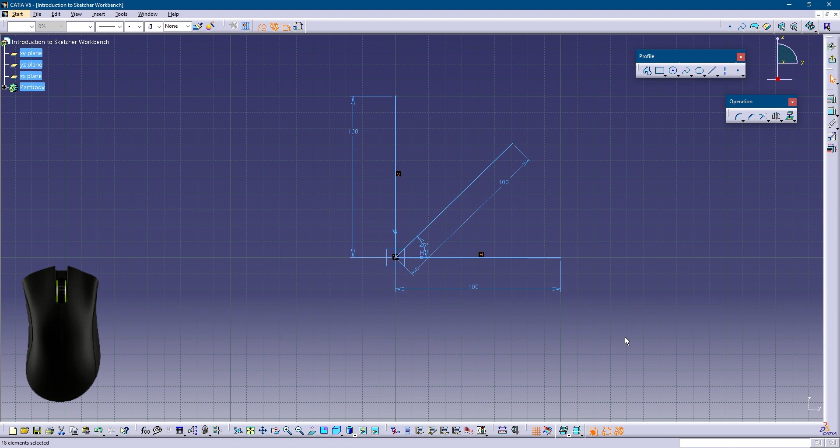Drag and drop the mouse to select the sketch, and press the Delete button. Click on the Line tool and give the first point. Previously, we manually added the constraint to the lines, but we will use this tool to add the constraint automatically.

Before we give the second point of the line, press the Tab button from the keyboard a few times and change the length. Do not press the Enter. Again, press the Tab to change the angle. Now, press the Enter. It will automatically add the constraint to the line.

Click on the Infinite Line tool. It will create an infinite line. This is a horizontal line. To change it, click on this icon to make it vertical. To make it inclined, click on this icon. Give the first point. Add the angle of 120 degrees.

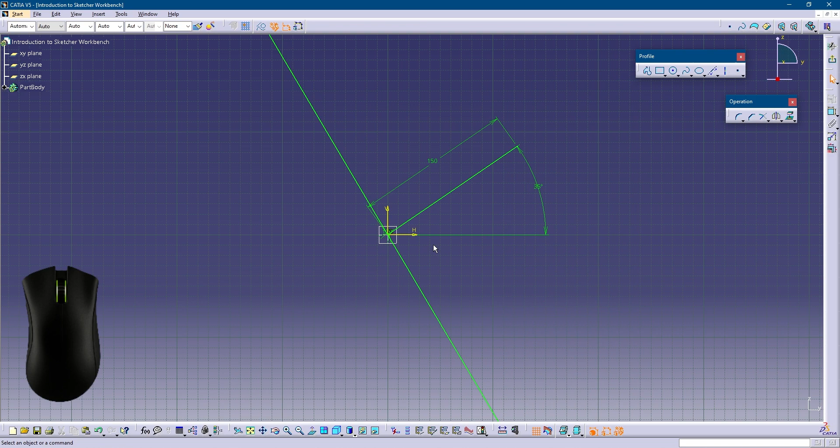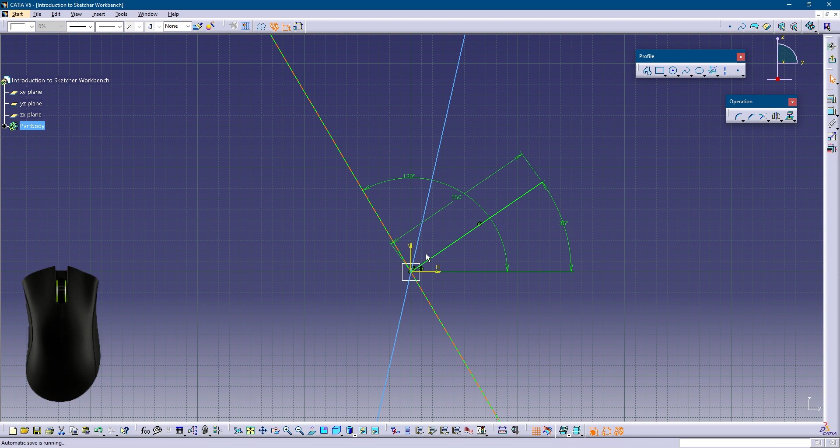Click on the bisecting line. Select any two lines about which the bisecting line will be generated. Select the sketch and press the Delete button.

Click on the Circle tool. The same can be accessed by going to Insert, Profile, Circle, and Circle. Give origin as a first point. Give the second point. Create one more circle.

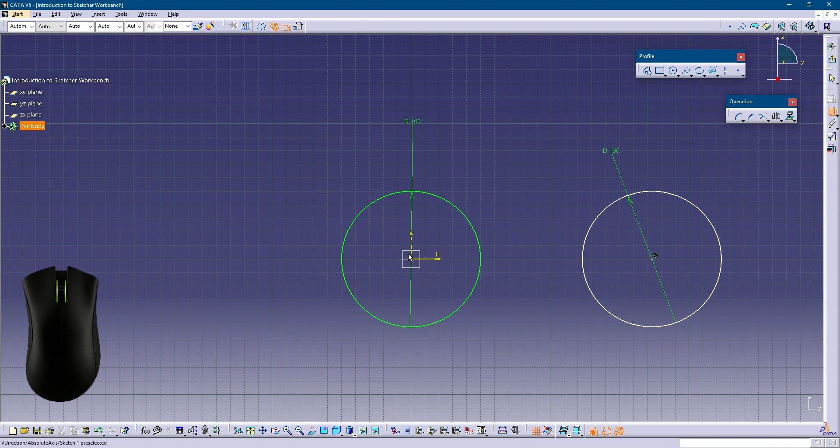Click on the Constraint tool and select the circle to add the diameter. Double-click on the constraint and change the value. Add a constraint to the other circle as well. Click on the Constraint tool and select the center point of the circles to create a distance constraint.

Now, click on the Bi-Tangent Line tool. Select the perimeter of the circles. It will create a tangent line about the circle's perimeter. The way we select the circle, the bi-tangent line will be created according to that.

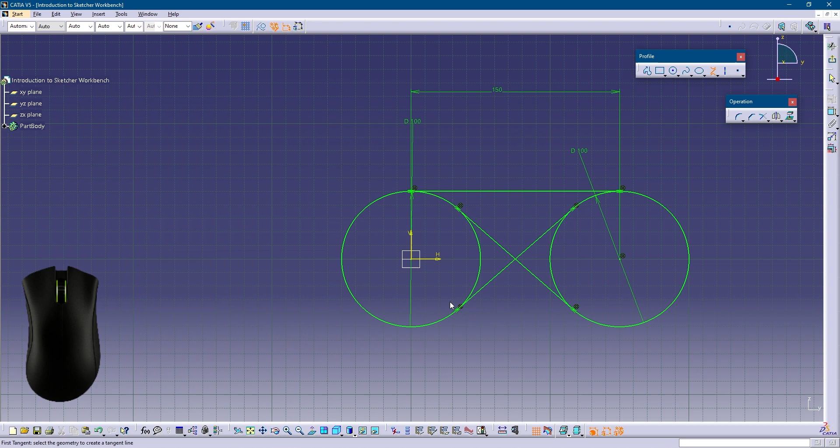Click on the Line Normal to Curve tool. Select the circle as a first point. Give the second point. It will create a line perpendicular to the perimeter of the circle. Select the whole sketch and press the Delete button.

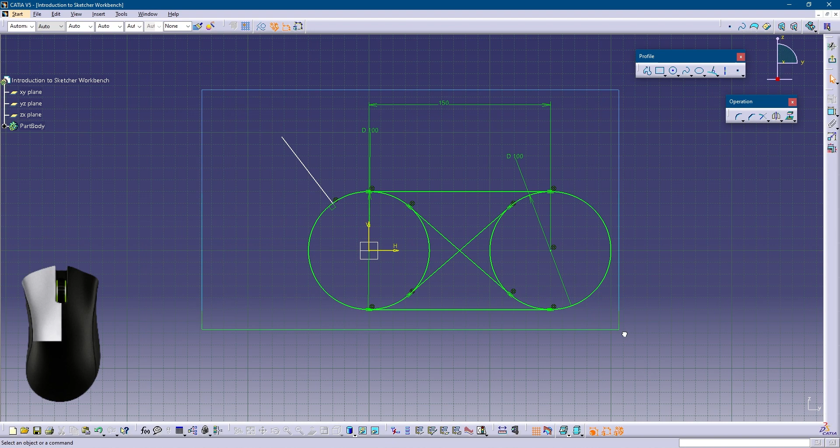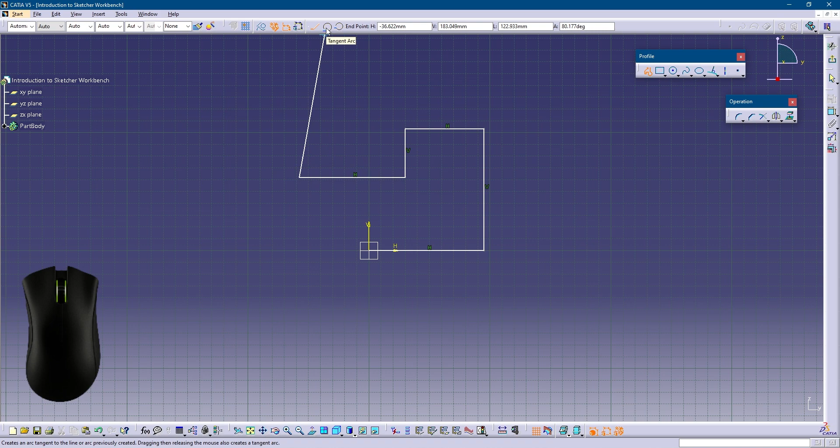Click on the Profile tool. The same can be accessed by going to Insert, Profile, and Profile. We can create a continuous line using the Profile tool. Click on the tangent arc icon to add the arc tangent to this profile.

Here, a few things to note. Some lines of this profile are in green color, whereas others are in white. Green means that the line or the curve is fully constrained. White means that the line or the curve is under-constrained. Make the profile fully constrained by using the Constraint tool and adding as many dimensions as possible to it.

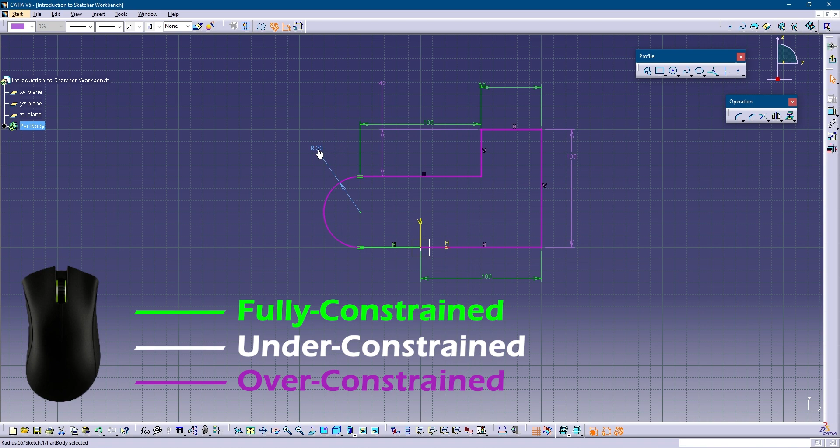Now, the profile is fully constrained. If I add another constraint to the profile, the color will change from green to purple. Purple means that the line or the curve is over-constrained. We have to remove any one of these three constraints to make it fully constrained. Just click on this constraint and press the Delete button. Now, the profile is fully constrained.

Select the whole sketch and press the Delete button. Click on the Rectangle tool. The same can be accessed by going to Insert, Profile, Predefined Profile, and Rectangle. Give origin as a first point. Give the second point. Click on the Constraint tool and add the dimensions to the horizontal and vertical lines.

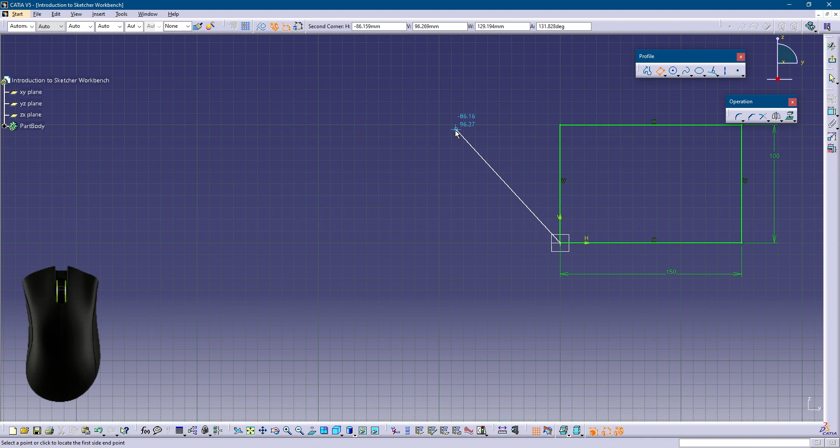Click on the Oriented Rectangle tool. Give origin as a first point. Give the second point. Give the third point. Click on the Constraint tool. Select the inclined line and the vertical line to add the angle constraint. Add dimensions to the remaining lines as well. Select the sketch and press the Delete button.

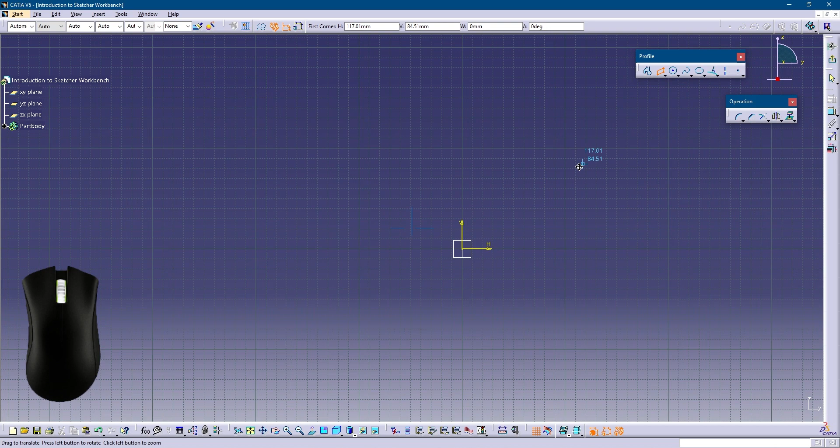Click on the Parallelogram tool. Give origin as a first point. Give the second point. Give the third point. This small symbol, which looks like the equal sign, means that the parallel constraint has been applied between these two lines. Click on the Constraint tool. Add length and angle constraint to the sketch.

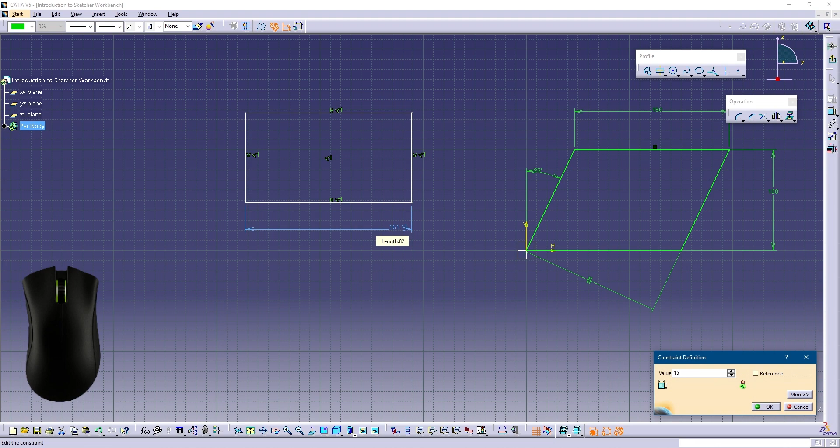Click on the centered rectangle. This time, add the first point anywhere on the screen. Add the second point. A rectangle is created about its center point. Click on the Constraint tool. Add the constraint to the horizontal and the vertical lines. Here, because we haven't started the sketch from the origin point, the sketch is under-constrained. To fix this, apply constraints about the origin point to the sketch.

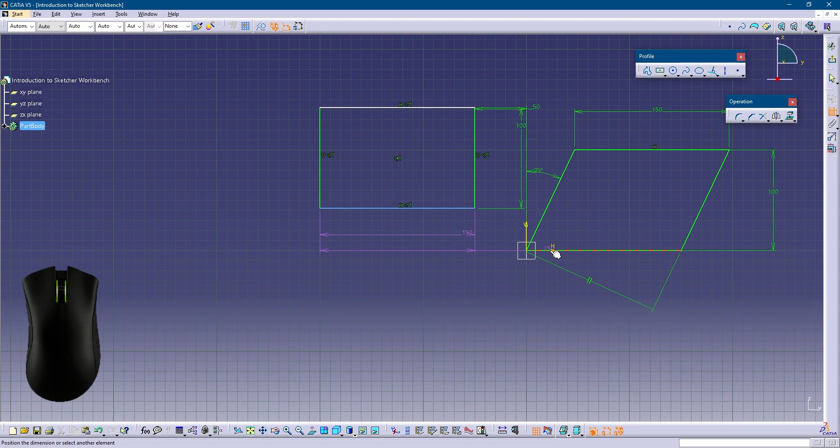Click on the Constraint tool. Select the vertical line and the V-axis. Select the horizontal line and the H-axis. Now, the sketch is fully constrained. Select the sketch and press the delete button.

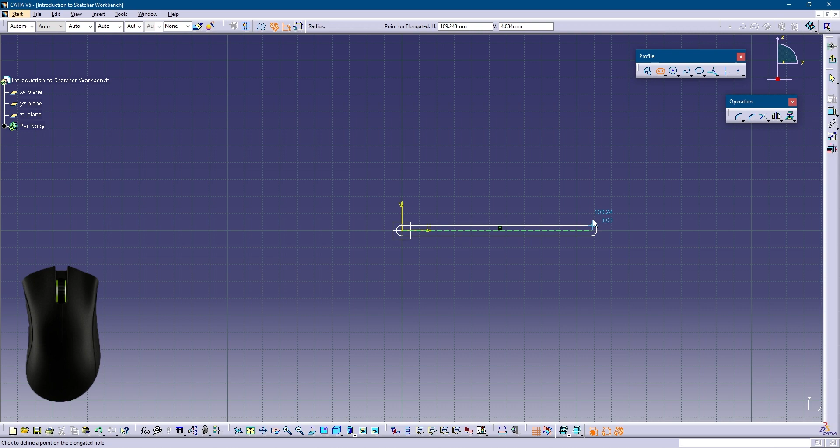Click on the elongated hole tool. Give origin as a first point. Give the second point as a length. Give the third point as a height. By default, the radius has been given. Double-click to edit it. Click on the constraint tool and add the length constraint.

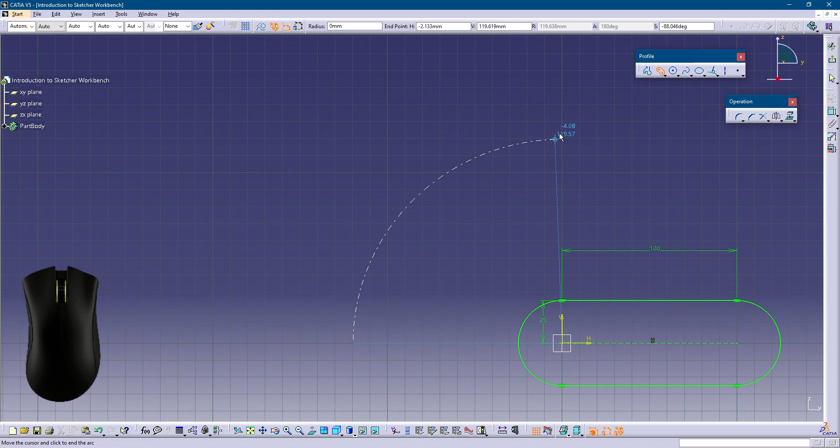Click on the cylindrical elongated hole tool. Give origin as a first point. Give the second point as an arc. Give the third point as an arc length. Give the fourth point as a height. Just like the elongated hole, the radius has been given. Double-click to edit it. Click on the constraint tool. Add the arc radius.

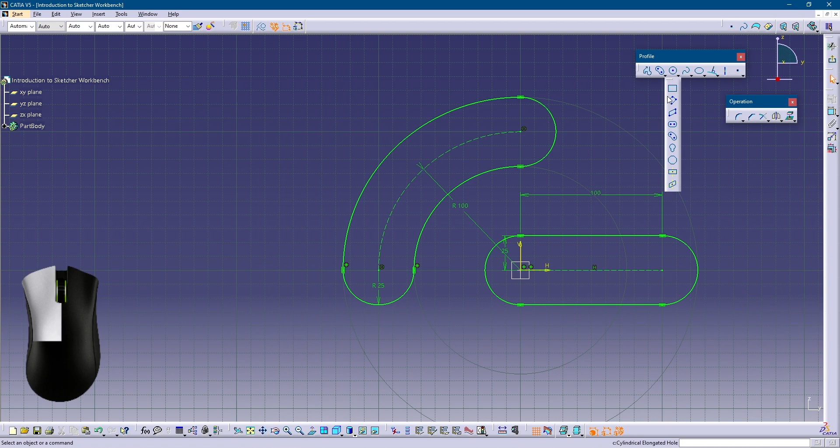Click on the keyhole profile. Give the first point. Give the second point as a length. Give the third point as a small radius. Give the fourth point as a large radius. Select the sketch and press the delete button.

Click on the polygon tool. Give origin as a first point. Give the second point. Again, click on the polygon tool. Give the first point. By default, the hexagon is enabled for the polygon. To enable other polygons, disable this icon called default number of sides.

This option might not be available in your version of CATIA, as I am using the R28 version.

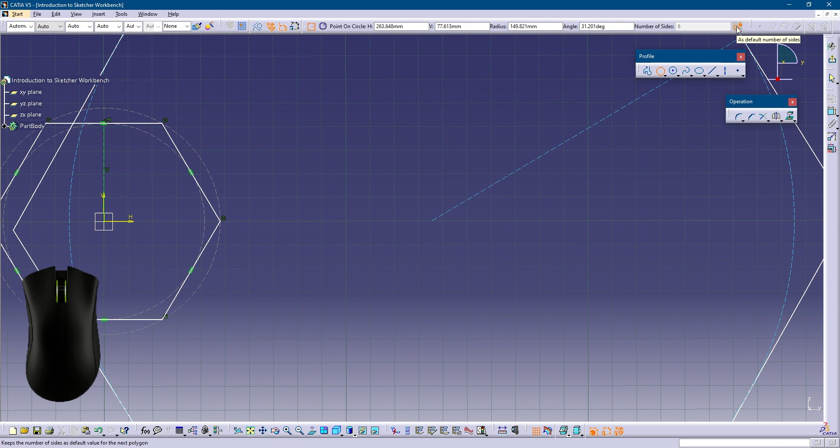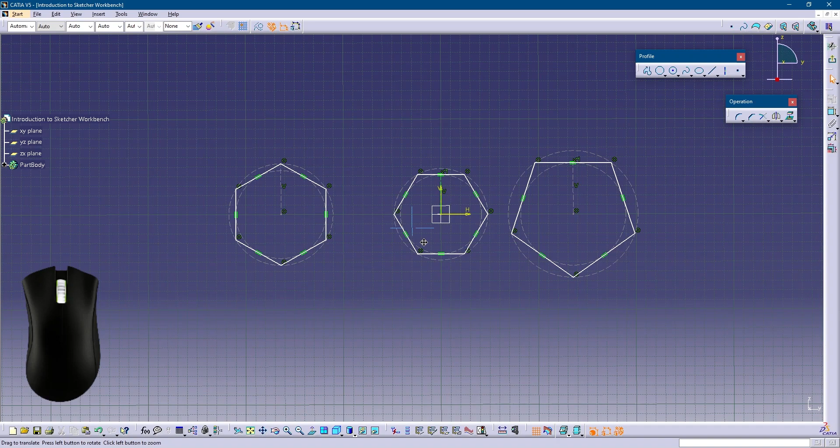Give the second point. Now, change the number of sides as per the requirements. Again, click on the polygon tool. Give the first point. The polygon that is shown is created inside the circle. Click on this icon to change the polygon projection method. Select the sketch and press the delete button.